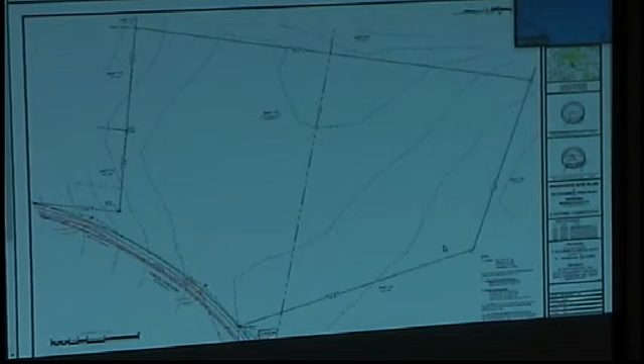So this area and this lot, it's under agreement, and he's looking to purchase it to be able to move his operation from Marion Road over here. Being a resident myself, I think this is a great idea because if you know where his site is, there's a lot of traffic there on Marion Road with their trucks. So this would be going in and out of the end of Charge Pond Road, and you could flip to the next page.

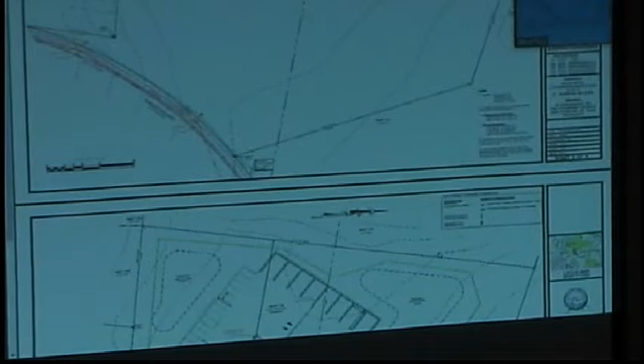I don't want to go through all of site plan review because Mr. Rowley is not here, but you can see all the parking spaces and how this is going to be set up. It's going to have a 6-foot privacy fence, and it's going to be landscaped in the front. That's part of what he does. So it's trying to keep any sort of intrusion to residential as minimal as possible.

So we really feel like this does warrant a use variance. It meets all the requirements under the variance standard because the actual topography of this triangle in the front and the mixed zoning is there. The other variance that Mr. Aquina flagged was this landscape buffer variance, which is tricky because of the mixed zoning. But you can see how the engineers and my client set up the property - we've attempted to create a big buffer there. We can go more into the particulars if we want, but that's the initial presentation I have for you.

We also, and you should have it in your file, have 4 letters, maybe one more, from abutters, including the direct abutters and other residential people who have homes over there, because that was one of the concerns - is this going to be of issue to them? One even discussed that there's another landscape business directly behind their property, and it had very little impact. So when we're looking at detriment to a neighborhood, I really feel like there won't be much. I think it would be an improvement for the town, welcoming this small business to expand and service the residents of Wareham and surrounding areas.

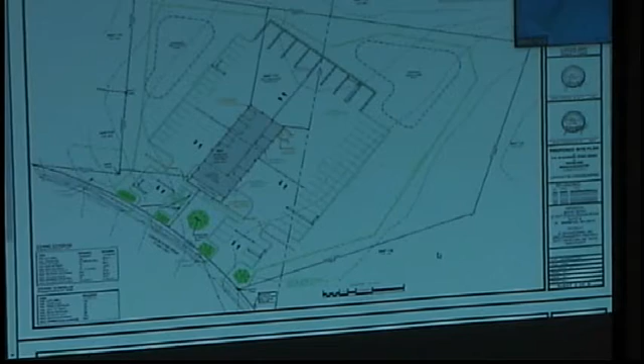Where did he get the 40 foot buffer? They want 40 feet between 2 districts. But they're calling it industrial, when this is general commercial and residential - that's 20 feet. No, they're calling it an industrial use because they couldn't think of any other thing to label it, that was just out of thin air. If I could clarify, because there's split zoning, he's saying there has to be, per bylaw, 40 feet between the residential and the commercial. No, residential to commercial is 20 feet. I read his letter - industrial. He's calling it industrial, I don't understand why, but that's his opinion, and that's why we're here. It's landscaping and it's commercial, not industrial, but I agree, let's go forward on other things.

So the major thing today is the variance, the use variance, correct? And that is because you're encroaching on the residential land? The variance is a use variance, so it's the same standard under 40A - we're talking about topography, the shape of the lot, which meets this uniqueness. Then you have to go through all the factors, which I did through my letter, but I can go over them. Looking at literal enforcement of this bylaw would obviously create a financial hardship for him.

He's under agreement, he's moving forward, and he's done a lot of work to be able to move forward. He's trying to grow - you can see on Marion Road, that's a tight space. He has the parking, and this actually allows 2 parking lots in the front for customers. So you go in and pay your invoice, and the other parking is for his trucks or his staff in the back.

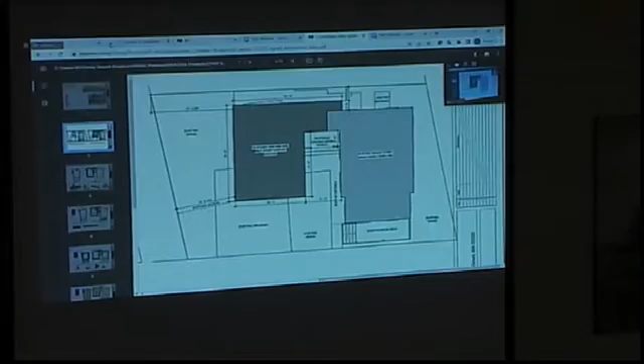She makes sense - if you make it flush with the house, now you give your neighbor another 3 feet. And if you want to keep the 16 in the front, go instead to the left - instead of 15.8, you could go another 5 feet. You don't even need a variance for that. So you could do it wider, then instead of one narrow tall one and one long one, you'd have a 2-car garage. You could still get your boat in - make it 24 by 24, it'd be beautiful.

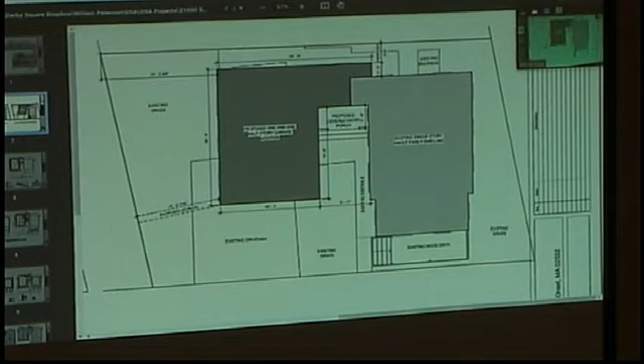This is the architect, Bill Peterson, of Derby Square Architects. Could I ask us to look at sheet 4 so we can maybe better understand why it's positioned the way it is? Sheet A4 - can we get that on the screen? It's on the screen now.

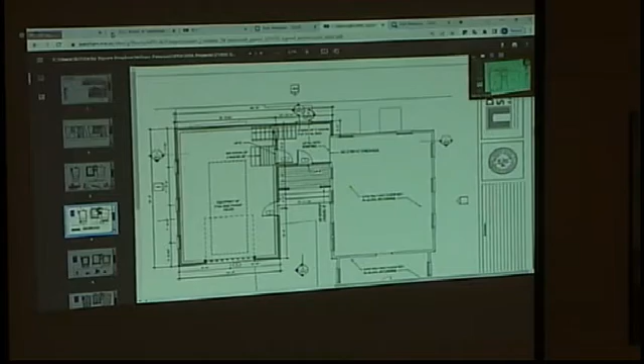Okay, yeah, keep- let me... Oh, you want to see it without your glasses? That's not what's on the screen. All right, what's your point?

So what's in that 3 feet that we don't want to give up, the stairwell? We were previously looking at the site plan, and I wanted you to understand the floor plan and the way it's oriented. Yes, you could shift it forward, but you would take away usable space in the front and in that courtyard area, while potentially gaining 3 feet in the backyard. That's what is unusable now and would be unusable then.

You'd be taking away 3 feet from the front that is usable for garden, for the patio space in front, and for that front driveway. You would also potentially eliminate a parking spot, an off-street parking spot in front of the garage. If you moved it any closer, you'd be pushing one car and putting it on the street.

Yeah, 16 and a half feet. My pickup truck's longer than 16 and a half feet. All right, that garage is 30 feet deep, right? Sir, it's 28 feet, 8 inches. Yes, effectively, if you go 24 by 24, it'd be a 2-car garage, and what's wrong with that?

And you give the neighbor 7 feet—they're very nice—but if you give the 3 feet, it's better, gives some more air, and it's better construction for everybody. It doesn't matter if you have a suburban, you could still fit a 24 feet deep garage.

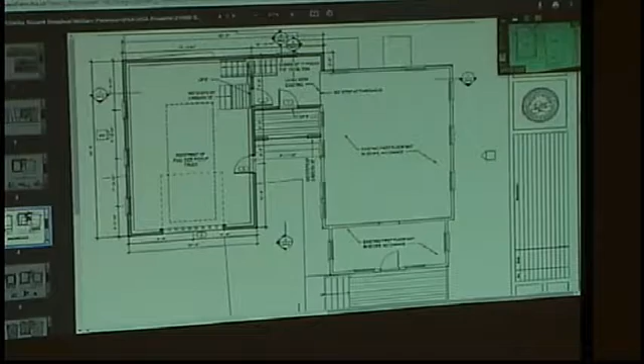I just want to say too, about using the yard—the neighbors have a right to have 10 feet. They don't have 10 feet, and you're asking them to accept this house at 4 feet, which is a big nonconformity. It is existing, but that doesn't mean we have to grant it. It is existing, they have 4 feet right now. If we feel it's detrimental, we'll act upon it as a variance, and it'll be pretty much dead in the water.

So what do you wish? I would like to keep it so I have more usable yard. It might not pass, you might not get the votes. And then, if I do go forward, I could end up losing them.

Go home, think about it, come back on the 27th, or you could go with what we recommended. Are you anxious to get the project started, or do you have time? Vote tonight, or in 2 weeks? I want it to pass, too. Yeah, exactly, I do want it to pass.

You know, talk with your architect about the merits of having the ability to put 2 cars in the garage side by side, and gaining a little more room in the backyard to keep the board happy, while still being able to park to the side of your garage as currently proposed. Your architect's going to charge you more money to redraw the plans.

He actually asked for a continuance. He said you should continue it. He just texted you back and said you better continue. Aren't texts a wonderful thing? We didn't even hear it, we could just see your phone light up.